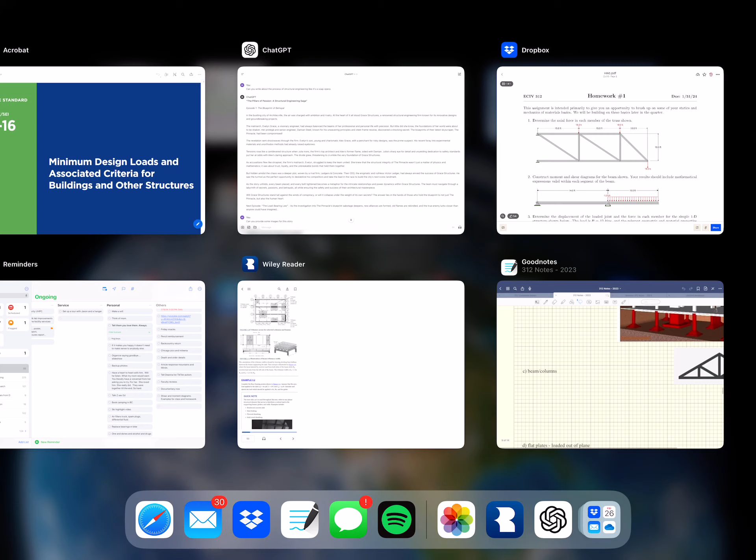I asked ChatGPT, can you write about the process of structural engineering like a soap opera? And this is what I came up with: The Pillars of Passion, a structural engineering saga. Isn't that creative? Because I'm into soap operas, like that one I showed you on YouTube last week, My Secret Life of My Billionaire Husband. I thought this was pretty interesting.

I read through it, and then I was like, oh, this is great. I'll post this on our D2L page, you can read through it. I was pretty into it actually, and I said, could you give me an image that represents it?

What it involves is there's a Grace structural engineering firm, and someone goes through and alters the plans to change it, and the other people didn't like the changes associated with it. So who did it? Who made the changes to the plans? They have lots of puns throughout.

Their protege and senior engineer, Damian Steele, known for his unwavering principles and steel frame resolve, discovered the shocking secret: the blueprints of their latest skyscraper, the pinnacle, had been compromised.

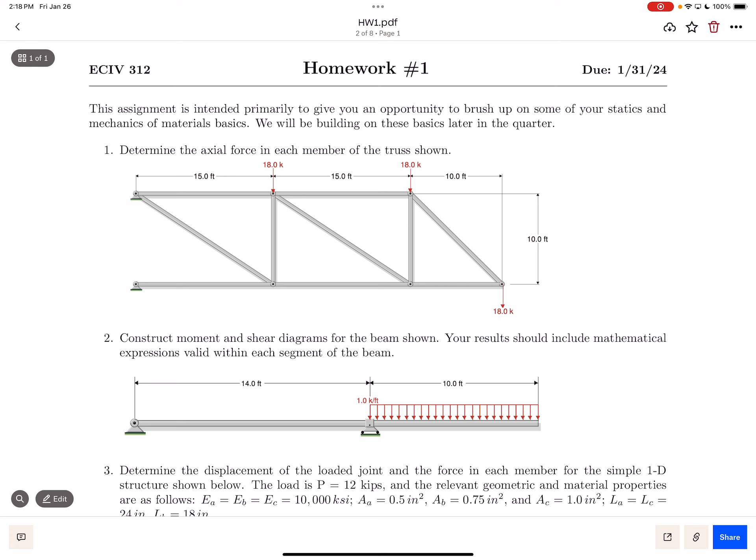This guy, shear moment diagrams, right? Including the mathematical expression is the hard part, not just drawing what it actually looks like. That's pretty straightforward, but actually giving the moment and shear equation at each point is harder. There'll be a shear and moment equation on this side, and a different one over here because there's a discontinuity there.

Same thing you do: you start out with reactions, and then you go from there. You could use whatever method. I did it two ways when I did the shear and moment diagram.

I don't even remember what it's called, but you figure out the reactions, and a reaction with a downward force will cause a jump down in your shear diagram, then it's constant as you go across, and then the shear goes up, bumps it up by that magnitude, and then goes across, or it'll decrease like that. I did it that way, then applied equations using derivatives and integrals and stuff.

The other way I did it was with method of sections, where you can cut this thing and you have a function of x, and then out pops the result, and you apply equilibrium with it. Either way, do your favorite method for doing shear moment diagrams.

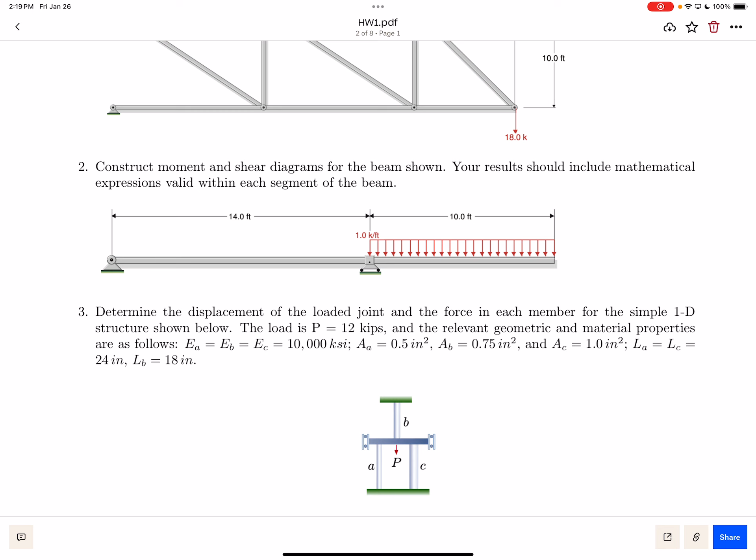Eventually, both of these things are going to come in heavy. We're going to talk about other ways of solving these things than you covered in mechanics of materials, but right now it's just a refresher. Let's start thinking like structural engineers again.

And then this guy right here: we apply load P right here, these things displace down, and then it pulls on this. So these two get squished, and then that guy gets pulled, right? The key to this is this thing isn't going to rotate, so they all undergo the same displacement.

You guys did this stuff, right? They all undergo the same displacement, and then all of them have to add up to P. And then I give you all those — there's the PL over AE, or AE over L times displacement gives you the P. So just a little hint on those things. Apply that and go from there.

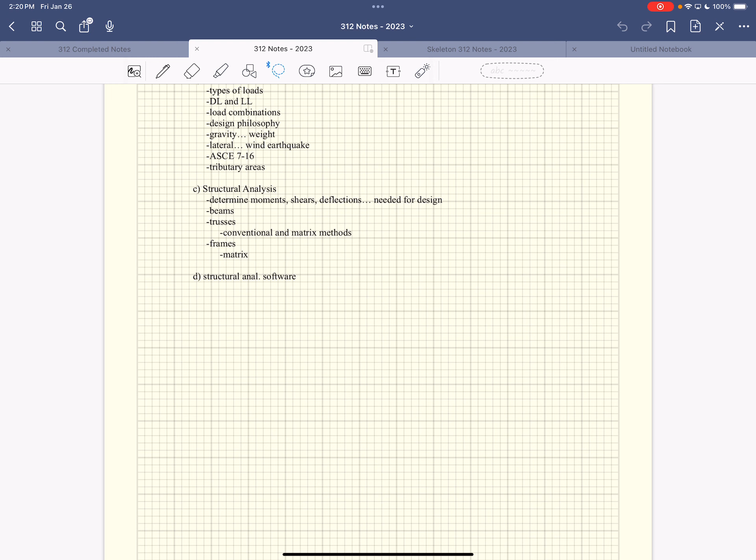Okay, so what we were just covering, we were talking about the flow of the course. We're going to talk about structural systems and behavior, types of elements, structural systems, gravity systems, lateral loads. Then we're going to do structural loads, right? This is probably by Monday we'll start all the different types of loads and the load combinations, design philosophies, gravity and weight, lateral loads. I'll introduce ASCE 7-16, that's what governs all of our loads. And that's kind of the first half of the class-ish.

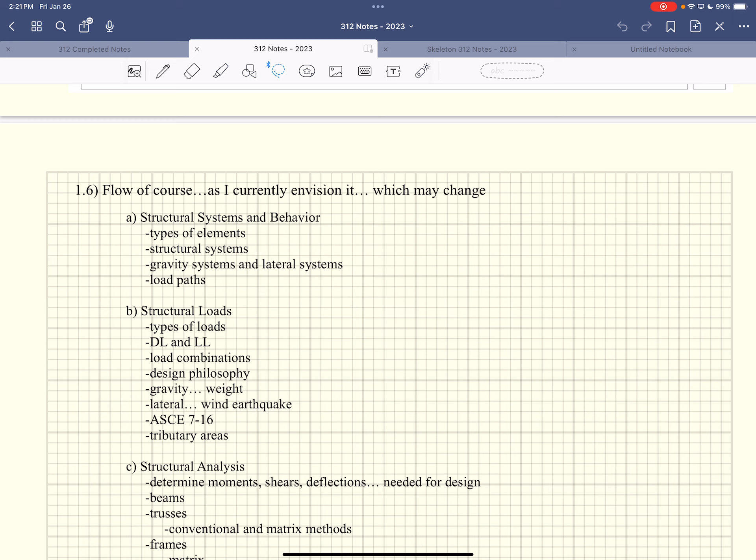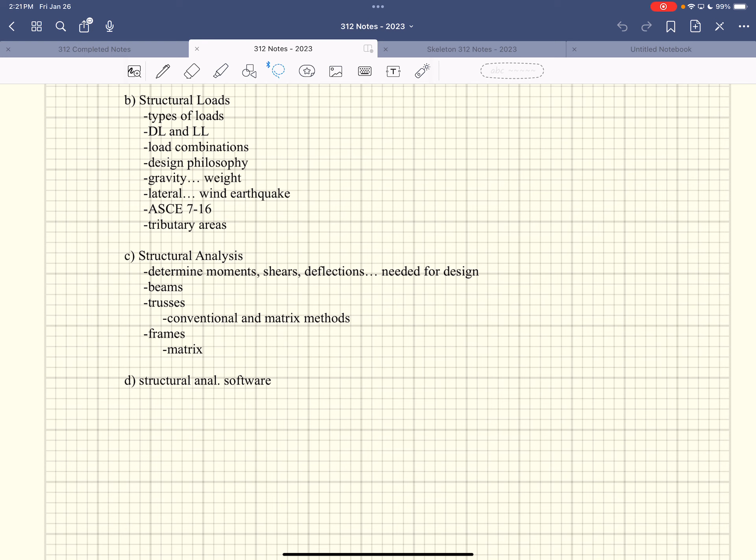This takes a while to kind of work our way through that. And then we'll get into structural analysis, right? Where we're going to be looking at moments and shears and axial loads and stuff like that. And we're going to mainly focus on matrix methods, and then we're going to work into structural analysis software, right? We're going to apply it, we're just going to draw a diagram in a computer program, and it's going to tell us all those things, right? But it's all based off of matrix methods.

Okay, so let's dive into structural systems and behavior. This is very, very basic, as if you've never even heard of structures before. We're going to have the main structural elements. So usually when you think of a structure in terms of buildings, you have a frame. This is considered a frame, where it has beams, it has columns, it has slabs, it has walls, things of that nature. So let's just go through and define, in a typical frame, the different elements.

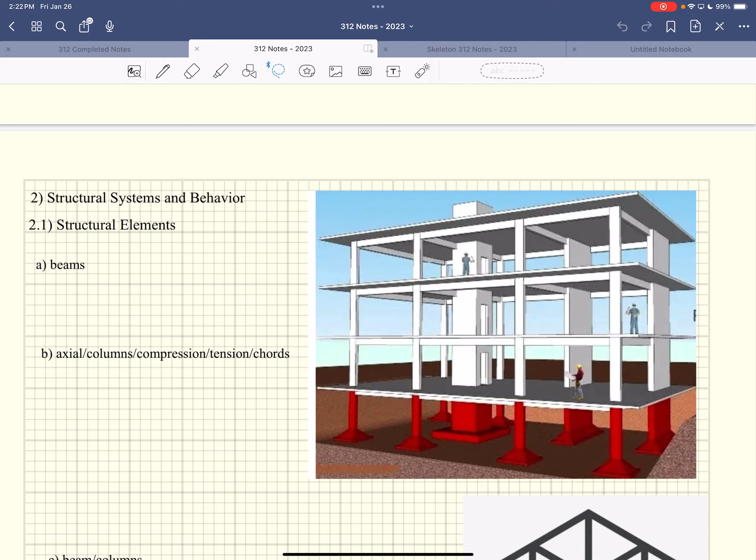Obviously you've heard of beams, right? These are the beams. This is what you've done, you've done the beams a lot in mechanics of materials. I mean, they're just transverse loads. They're modeled like this, typically a simple support one. They have transverse loads on them, like that. We apply loads like this. They carry loads with bending. That's kind of the beams.

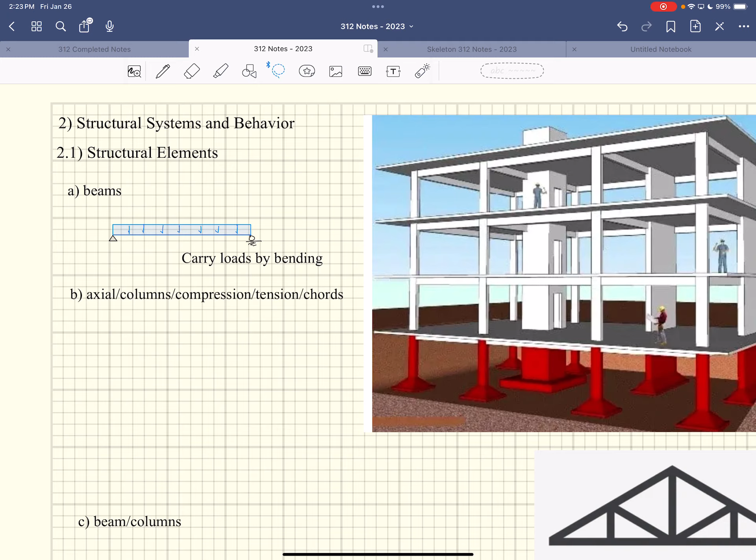Right, we've all seen beams before. That's these members, beams that are going across that way, and then this way as well, and they're loaded like that. And obviously, those are structural elements, and we have to design those. You could draw a little arrow if you want, but those are pretty straightforward.

And there's axial loaded members, right? So these beams carry loads by deflecting down and stuff like that. But there's axial loaded members. By axial loaded, these might be, I think I have different titles on your notes there, but I think I call them columns and compression members. But there are actually tension members out there and things of that nature. So I expanded a little bit to talk about axial loaded columns, or axial loaded things in general.

So that it covers the columns in our frames, right? But then sometimes these things can end up in tension. Another example would be a truss. Trusses are axially loaded, right? In trusses, they're called chords, your chords of your truss versus the columns here. But I mean, in those guys, right? They are...

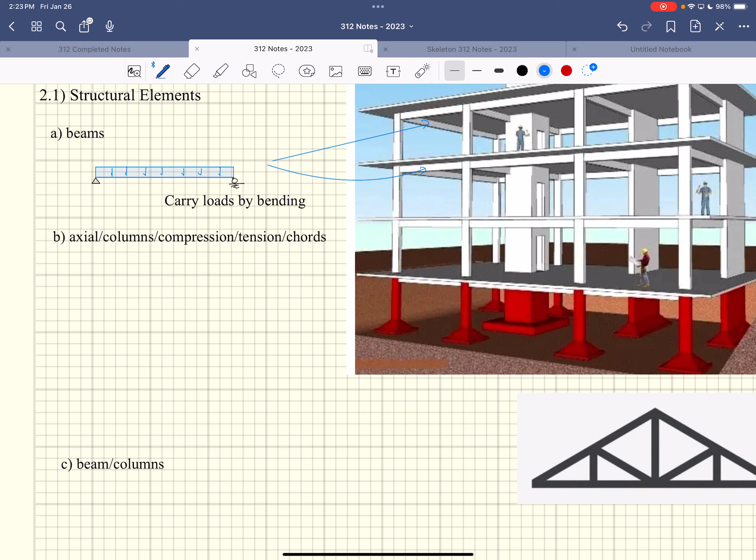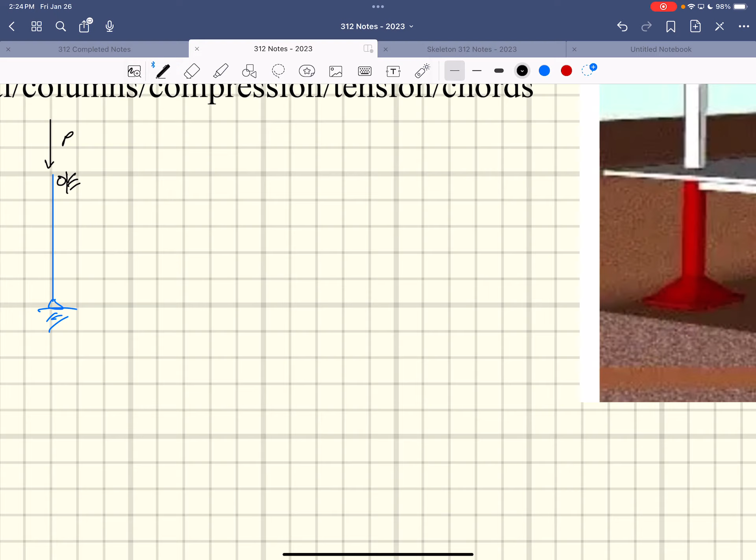...idealized as this, with some sort of roller like this, and then some load on it like this. These are axially loaded members, and they show up all over the place.

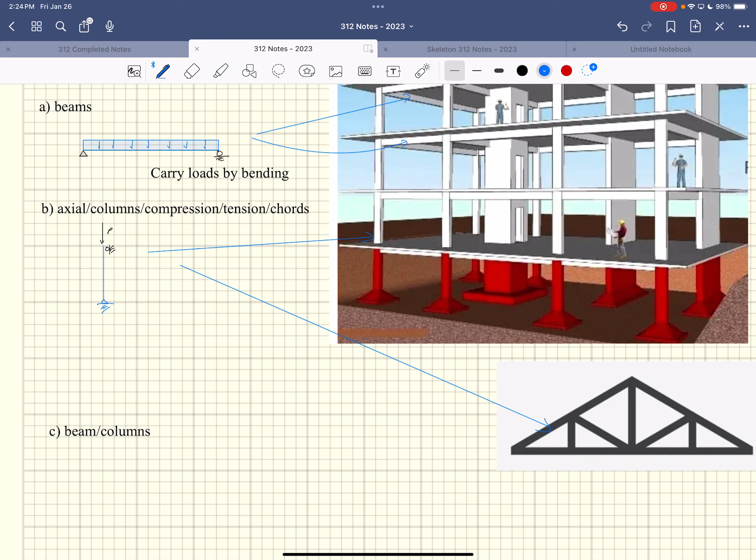Like I said, they end up as columns in these things. There's these. There we go, draw the drawing here. These are the columns. These guys are axially loaded as well in trusses. Like I said, they're either called columns or tension members. They could be in compression or tension, and then they're considered chords. They also have beam columns.

What do you think a beam column is? Very clever name for them. They act like beams and columns, right? They carry loads with bending and axial loads. We'll talk about systems in a minute here, but these things would be, they'd have a load on it like this.

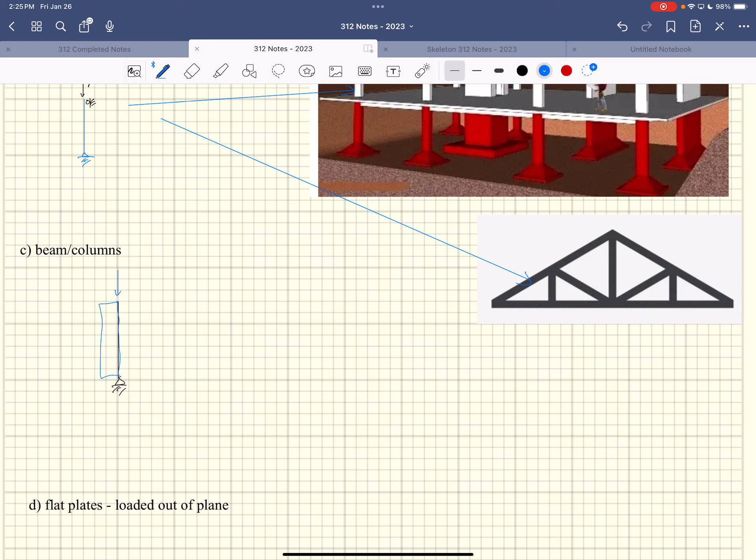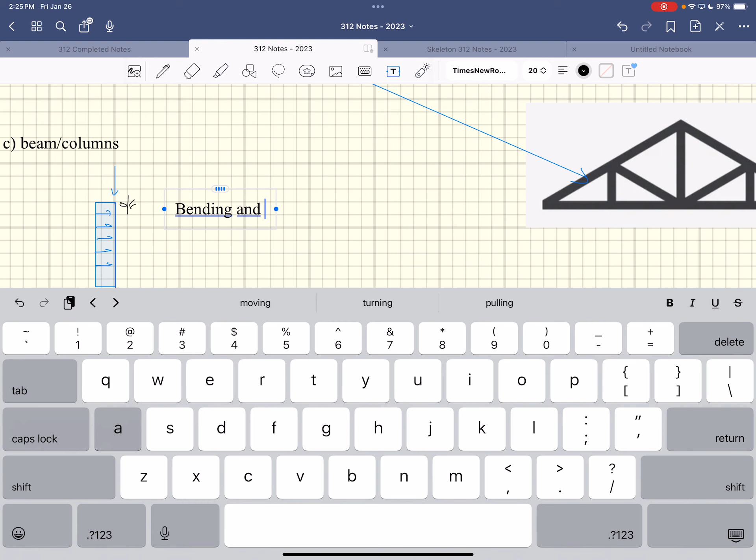Bending and axial load together - those are called beam columns. Very clever name, right? They act like beams and they act like columns, so what do we call them? Let's call them beam columns. That happens a lot. We end up with moments and axial loads on them as well.

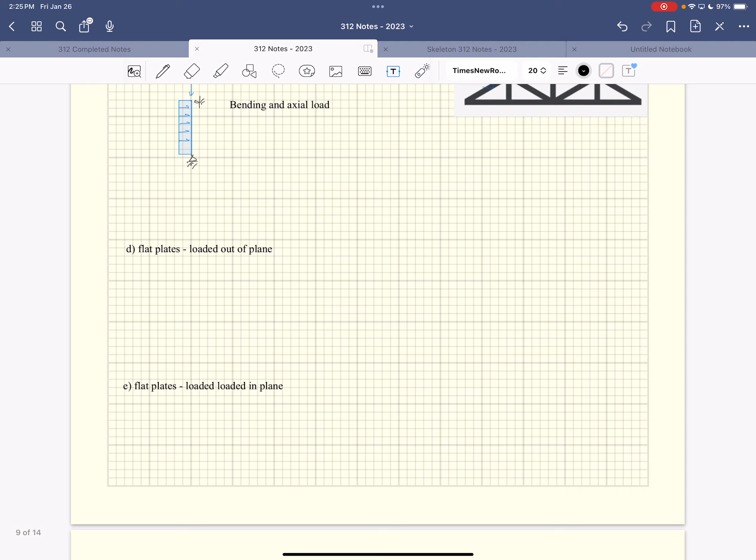The other element would be a flat plate - that's the technical term for it. You can load plates either in plane or out of plane, is what they're called.

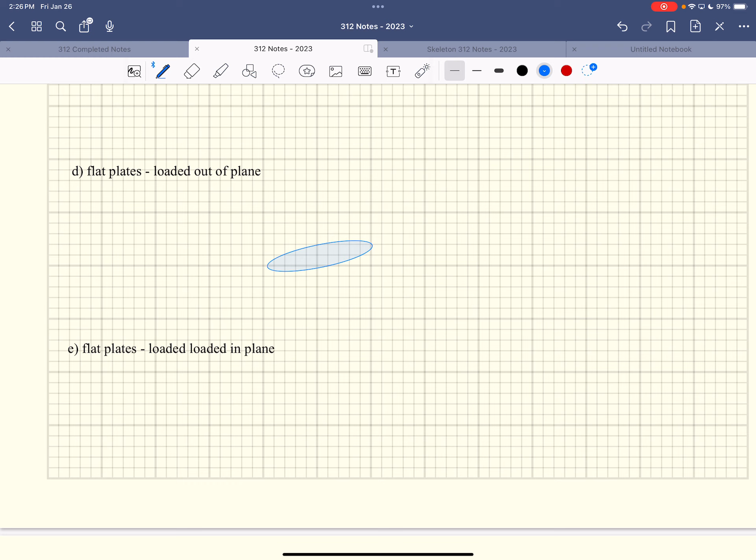Loaded out of plane would be a slab. Let's see if I can draw a slab for you.

One more time, what'd you do today? Well, the professor tried drawing a slab. Oh, I got it this time - I used the squares in the graph paper. That's a good start, I have graph paper there, I might as well use it.

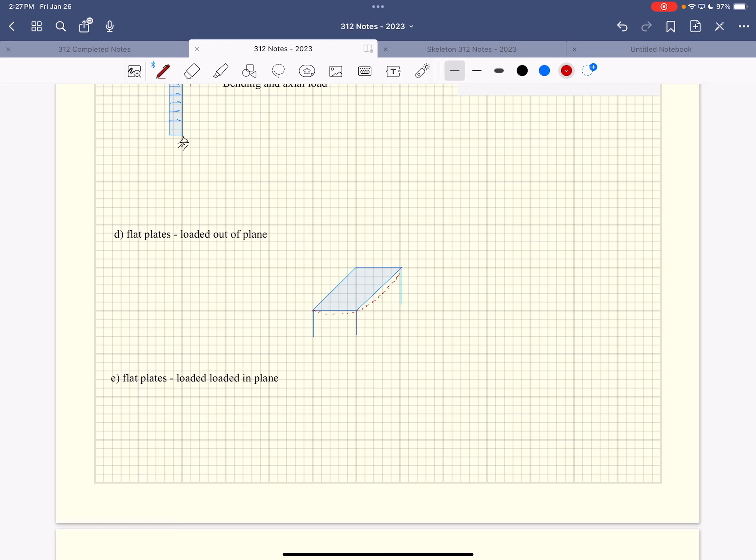What I mean by loaded out of plane: here's the plane of the wall, but I'm going to load it down like that, like a floor would do. This thing would deflect like this. It could deflect a couple different ways - there's one-way bending or two-way bending - but if you applied a load to the top of this thing, it's going to deflect down, kind of how I sketched it in red. So these are floors.

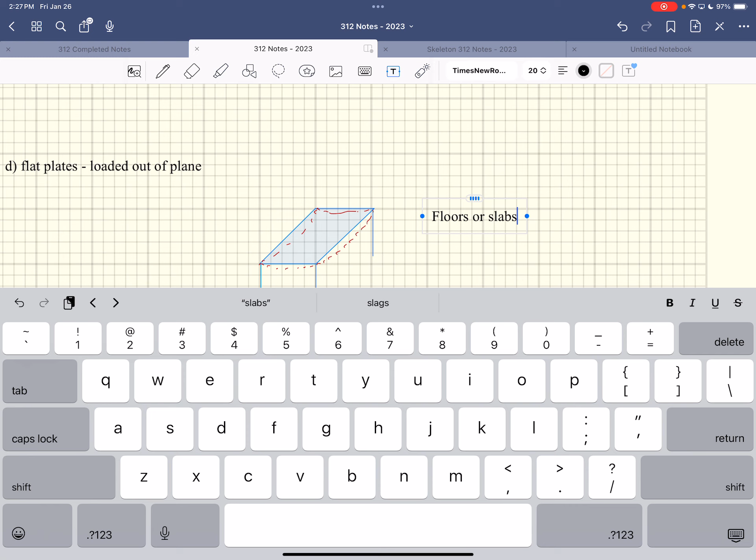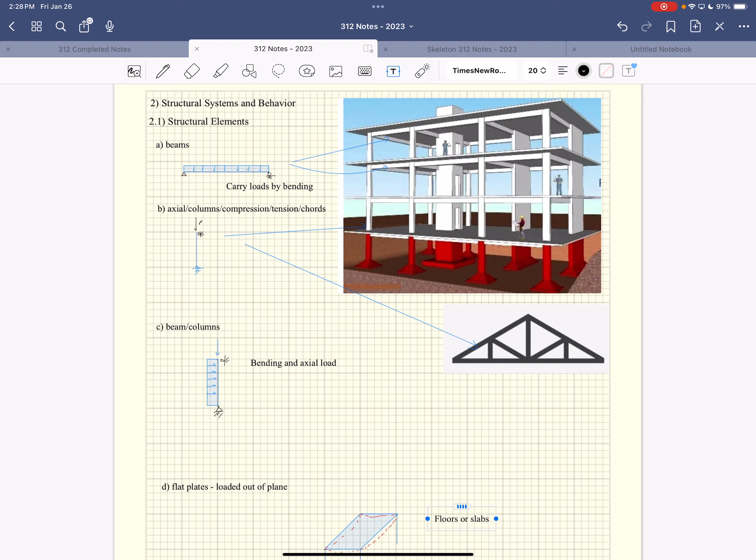Floors or slabs is another way to look at it. Those are easy to spot up here - these floors, these plates, these slabs are considered a structural element, and that's something we have to design. Each of these things we have to design - eventually we're going to design the beams, the axial loaded members, the beam columns, and the plates. So the whole design would be designing every one of those things.

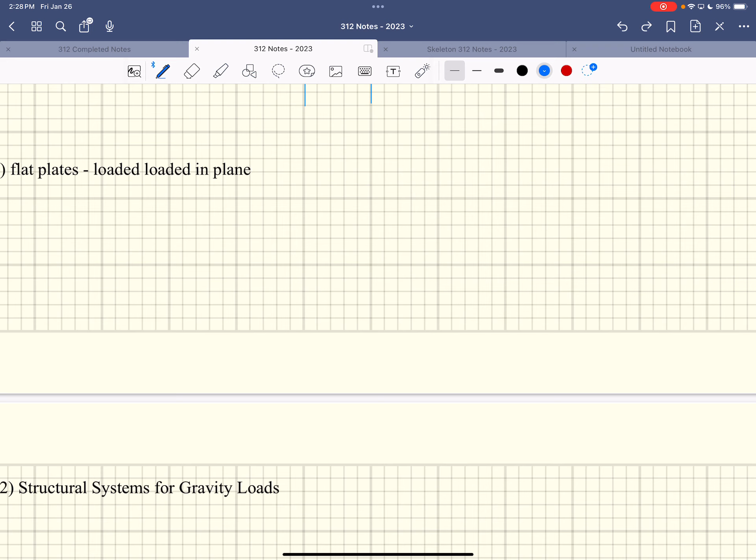This next one here would be flat plates loaded in plane. What I mean by in plane - let me try to draw another picture, drawn up on its side. Anybody else have trouble envisioning what it looks like in an isometric drawing? That's what I've tried to do, draw isometric drawings.

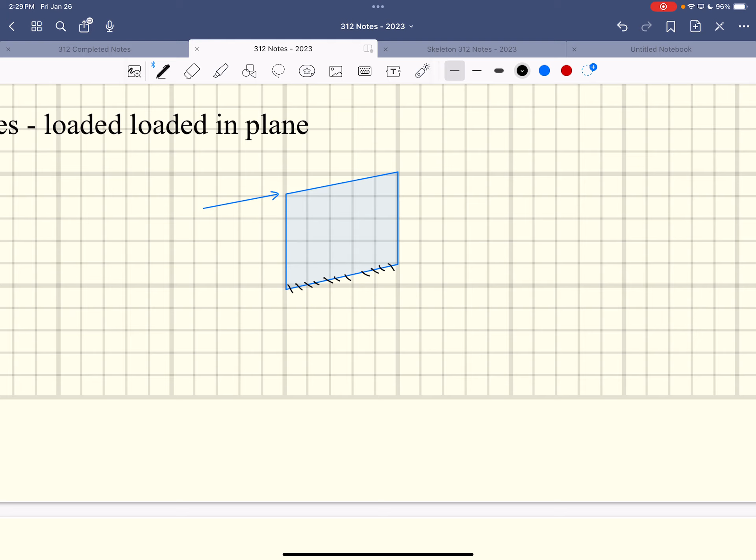Loading it like this - the ground is like this, the ground's down here, the support there, and you're loading it in plane. So instead of pushing on it this way, we're pushing it along like that, in plane. Why would we do that? Why would you load a plate like that?

Well, it's part of the lateral system - we'll talk about the systems in a minute. There's a gravity system and a lateral system, so if you push down on it vertically or push on it horizontally, there's different components. These things are called shear walls. This is one way that we can load it.

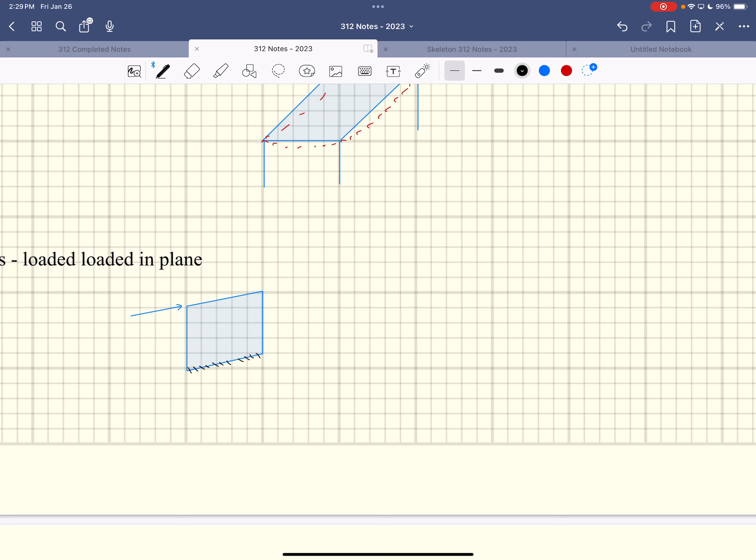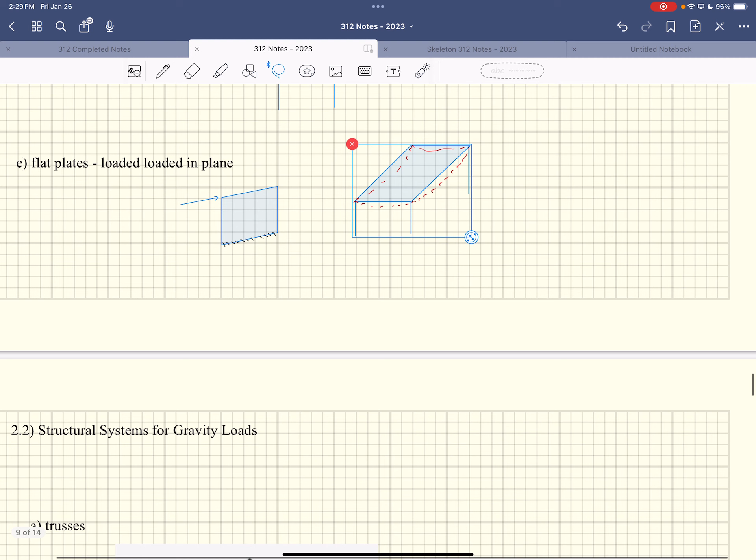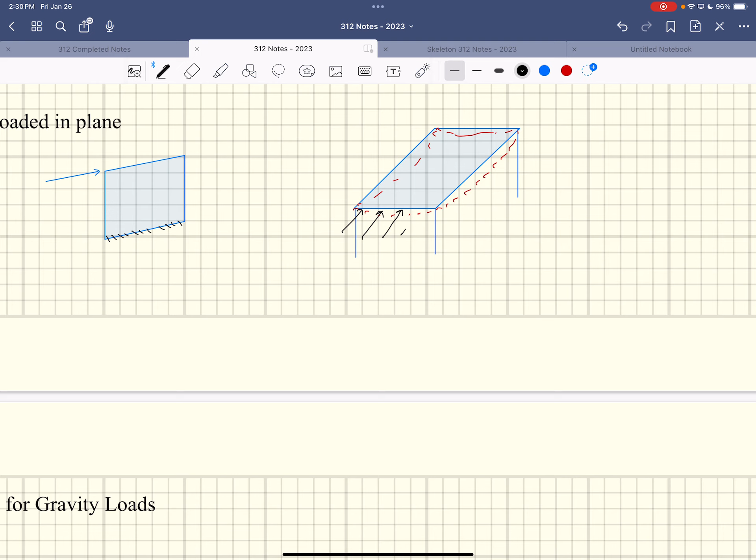The other way we can load it, like an in-plane load on a wall, would be applying a load like this - so if you had the same type of plate, you can also apply loads in that direction, still again in the plane that the wall is taken up.

Over here on the left, this is called a shear wall. When we talk about plates like that - and this is called a diaphragm, a floor diaphragm. When it's loaded like this, it's called a shear wall; if it's loaded like this, it's called a diaphragm.

We'll talk about those in more detail later, but back up to our structure up here - these guys right here, even the elevator core that they have in here, those are considered shear walls. Because you can imagine if you came in and pushed this thing from the side, say wind hitting the side of the structure - obviously there'd be cladding on the outside, but the wind hitting the side of this thing, those loads have to get resisted. These lateral loads are resisted by something.

One of the things that we resist it with is walls - it's actually a very common way, especially in housing. My house's lateral system is shear walls, that's what we put in to keep it from tipping over. And so you can imagine how these things are loaded - there's a big old point load that'll come in on each floor.

That'll come into the side of these walls, and so that'll be a wall or a plate that's loaded laterally, okay? The other one that I drew was a plate being loaded like this.

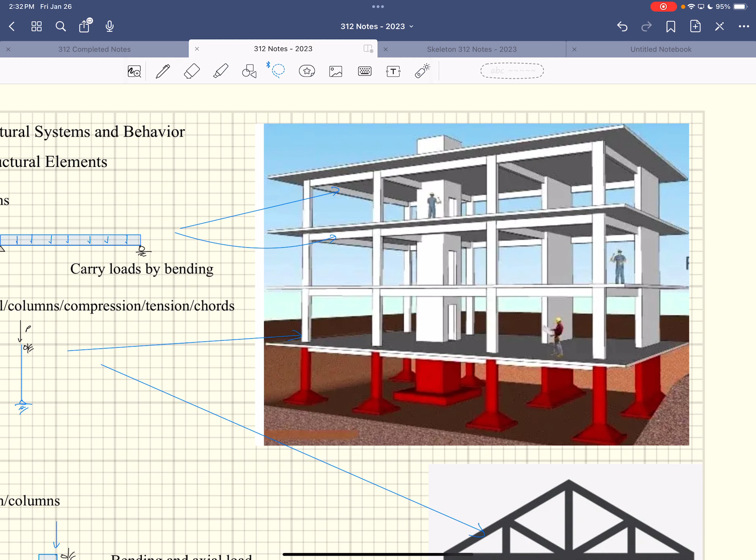Those are your main elements, really. All of structural engineering involves these basic elements. There's no other elements. So when you talk about the design of a structure, you're talking about the design of beams, the axial members, the beam columns, the flat plates in terms of the floors and slabs, and then the shear walls or the diaphragms. And that's it.

So all of structural engineering is, after we talk about getting the loads, you design. Structures 2 says, all right, how do we design these things? And all those other classes I showed you were all about how you go about designing these different things out of all the different materials, either concrete, steel, wood, or masonry. It's all about those designs. But these are all the basic elements.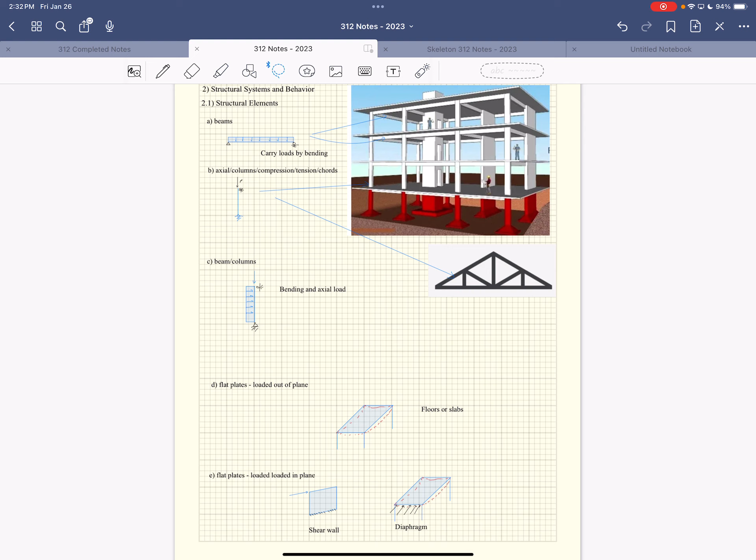The truss is made up of simply all axial loaded members. There's no other elements made in there. I lied a little bit though.

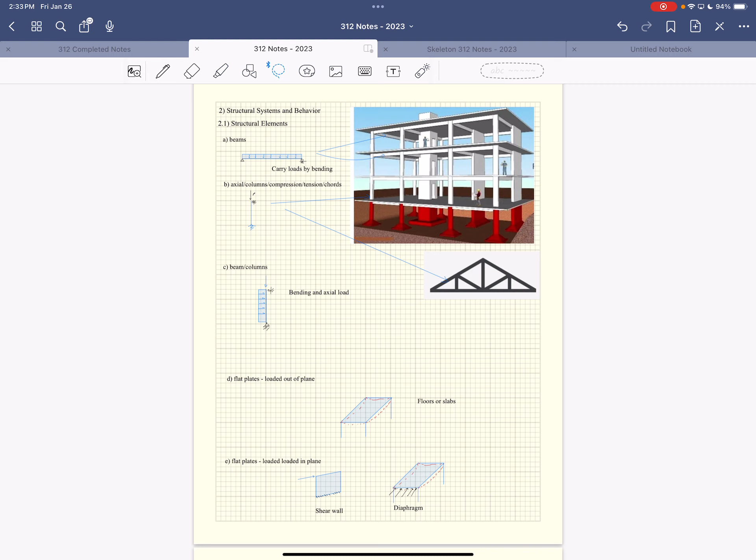There's not only designing these things, there's also designing the connections. You have to connect all of these different structural elements, and that's the other part of structural engineering: how do you go about connecting all of these elements? Because there's big forces that come into those connections. Questions about that? Those are the types of elements.

Those types of elements go into making a system. A system would be just a system of elements. The elements, all the things we just talked about before, but then how you confine them and connect them, and stuff like that, they all behave differently.

My notes are on my phone, by the way, so it's not like I'm texting up here. Sometimes I'm texting, but not right now.

All right, let's talk about the different systems. Again, I mentioned this before, there's actually 2 main types of systems: a gravity system and a lateral system. The gravity system has to do with supporting gravity. Well, what are the gravity loads? It's the weight.

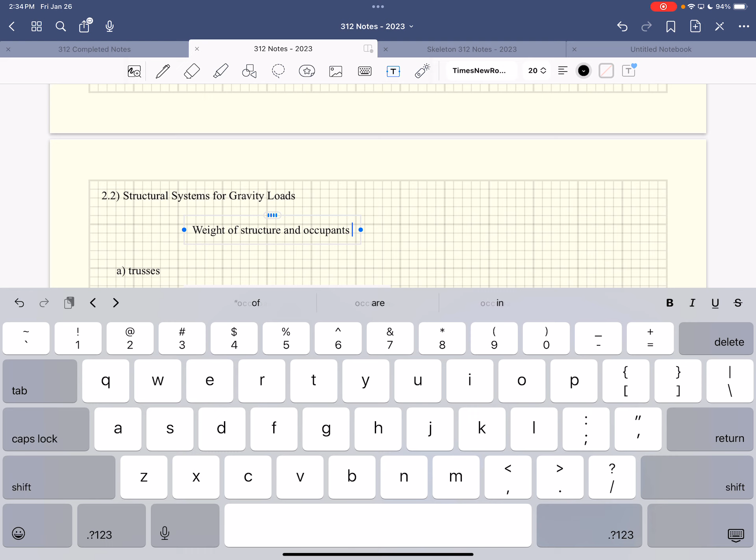Weight of structure and occupants, or occupancy loading, not just occupants, but it's all weight. It's the pull of gravity on the structure.

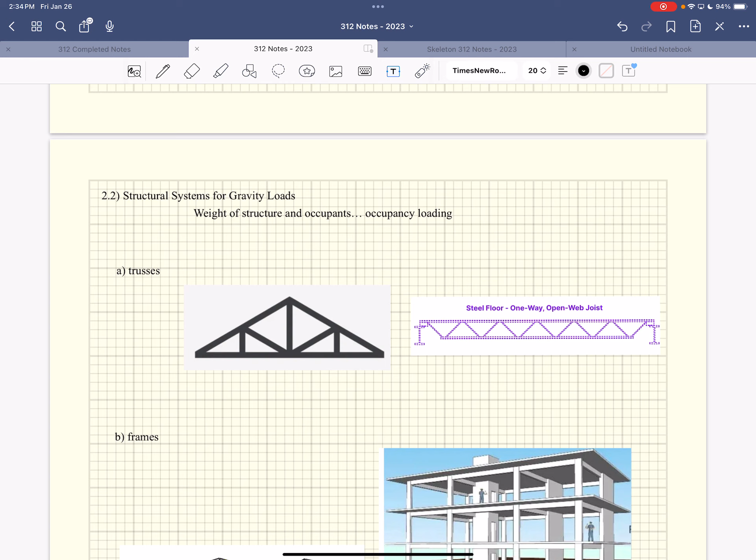Obviously, this is the key one. Back in the day, that's all people cared about. So your structures downtown, the structural engineers back in the day were like, hey, we just really care about weight because that's the most immediate thing that you see, and then, oh, by the way, there might be some wind or something like that. But nowadays, they're equally as important. You design for gravity and lateral systems, and that's why our structures stand up in earthquakes and stuff like that.

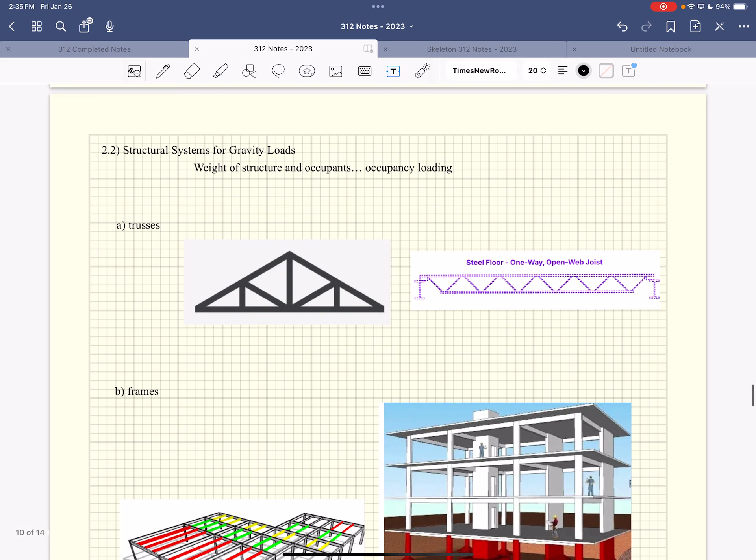So then what are the systems for supporting gravity? Obviously, there's the truss. You've seen these before. This is statics, you don't do anything in mechanics of materials with these. These are all just going back a couple semesters.

But this is a key one, and this is actually how they start all structural engineering classes, with the discussion of trusses and the analysis of trusses. And what's nice about them is you only put material where you need it.

You can make a whole triangle and it would be stronger than a truss, but we're just saying, well, how can we optimally use our materials? We'll make them spread out as much as possible, giving them the biggest moment of inertia possible. If you spread them out like this, you can carry more load. It's like making a deeper and deeper beam. So you do so with trusses, and you only put elements where you need elements.

I did a big research project a couple years ago. There's this methodology called topology optimization, where you model these things in finite elements, and then you say, hey, analyze this thing and do an optimization on it. The whole theory behind it is like the computer's going through, and it's actually based off the theory of evolution, if you believe in that sort of thing.

No, but the theory of evolution, where you start out with some design or some initial deal, and then there's rewards and penalties as you go along, and it goes through thousands and thousands, if not millions of iterations, and it evolves. If you do something right, it basically evolves into the optimal structure. So we did this big deal with a grad student of mine, and she went through and put in all these parameters, and we said, oh, this is going to be magnificent, we're going to put it in and let it run and see what it comes up with.

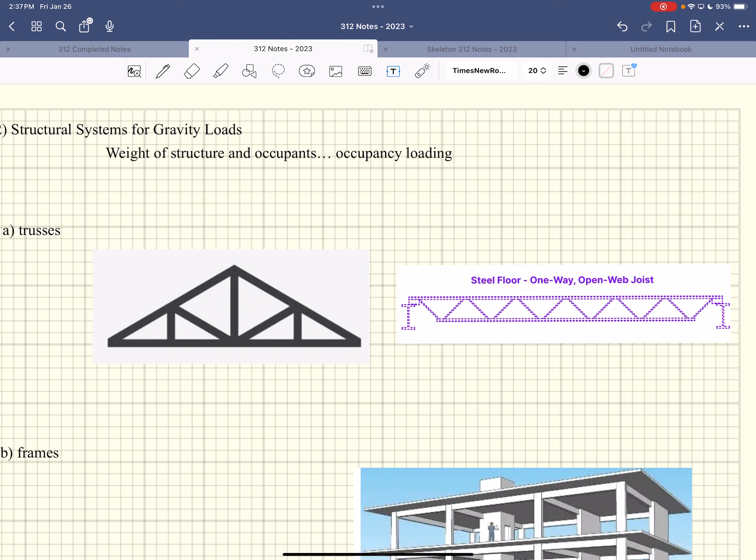The key parts are these parts, and then these are just used to kind of hold them together and transfer loads between them. So we'll talk about analyzing these trusses. The other most common type is a frame. These are our typical frames. They're called frames, and the frames consist of beams and columns and plates. So we already looked at these, but these are the typical structural systems that we'll see.

And we're going to build up to, well, how do the loads get transferred around in a frame? They start out in the plate, then they go into the beams, and then they go into these things we're going to call girders. When beams feed into those girders, the girders transfer the load over. That's called tracing the load path, and we're going to talk about load paths, because all buildings have these load paths associated with them. But this is the other type of system, a frame.

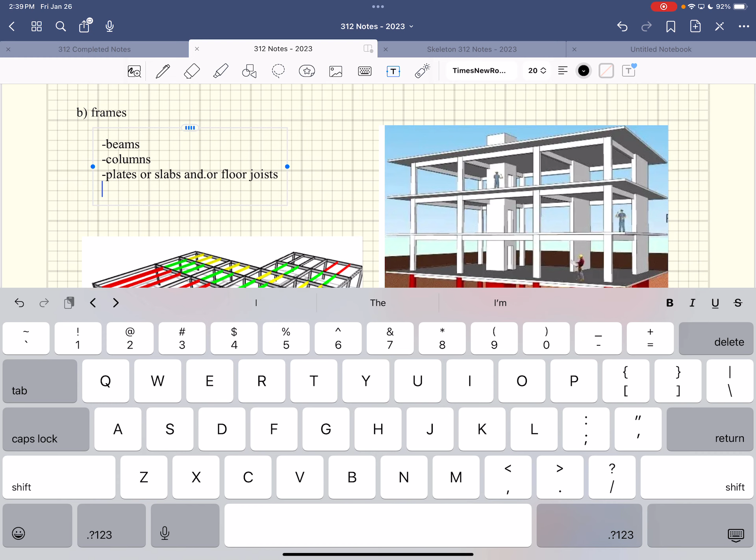They consist of, you might as well just write some stuff down every once in a while. They've got beams, they've got columns, they've got plates or slabs, floor joists, and or girders for now. Girders and beams get used interchangeably. Usually, what you call a girder is something that has beams framing into it. So you've got these beams going across, and the slabs sitting on those, and then those beams transfer the load into these girders, which come in as point loads.

And so usually that's what it means. If you hear the word girder, that's what it's talking about, which is a weird word to say. I just said it like five times in a row. Girder, girder, girder. Not weird, but it is weird. But then in a bridge, all the beams are just called girders. So there's a lot of interchanging terminology. In a building though, girders usually means that things are being transferred into it.

Another type of structure would be our cable tension structures. They basically draw like an idealization of that. You can imagine if you had a cable strung between two points and applied a load in the middle of it - that's structurally stable. It's kind of weird, but it is structurally stable, and it's carrying the load with axial loads. They're actually very efficient, cable structures are. You pull down, and it's just all axial loaded cables, which is pretty crazy.

I mean, just to put things into perspective, we'll learn about this in structures too, but you guys learned about yield stress and things like that, right? And maybe you never fully grasped like how strong steel, for example, is. Or let's start with concrete. Concrete can carry 4,000 pounds per square inch.

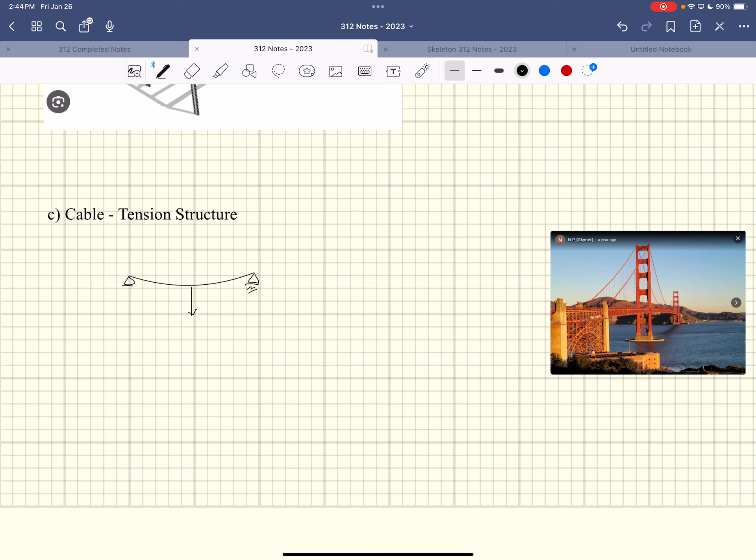The other one, off topic but cool, is the Brooklyn Bridge. Anybody been across it? It's phenomenal, so cool. Guess when it was built — 1869. Within 5 years after the Civil War. Isn't that crazy? They were building shit like that.

I read a book recently — well, had it read to me, I listen to audiobooks since I can't read. It's called The Great Bridge, about the engineering behind the Brooklyn Bridge, and it was phenomenal. It could be considered boring by some, but to a structural engineering professor it was very entertaining.

Especially how they did the foundation — these big caissons, pressurized. They'd go underneath it with this little bell isolated from the water, pressurized, and people were down there shoveling underneath it. As they shoveled, the bell continued to sink. Then they started using dynamite, blowing stuff up and going down to dig. Hundreds and hundreds of people died in the construction of the Brooklyn Bridge — it was incredibly unsafe.

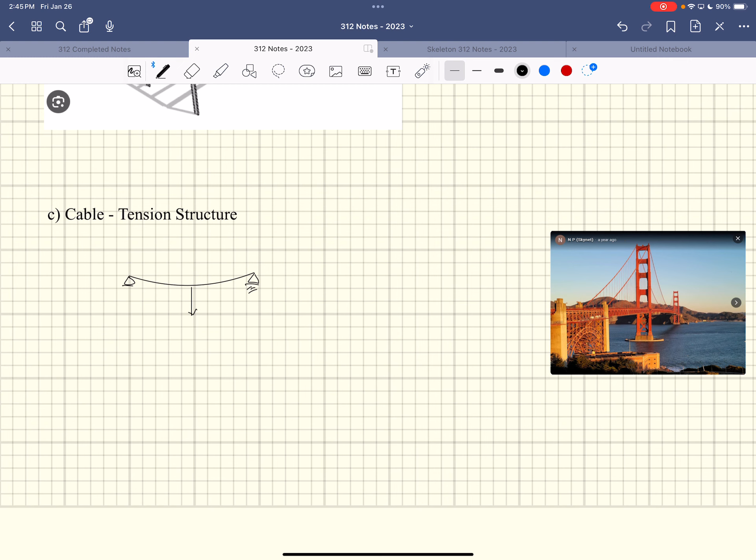But cable or tension structures are really cool — a very efficient way to carry loads. If it wasn't for that, you couldn't do these big, large spans and stuff like that.

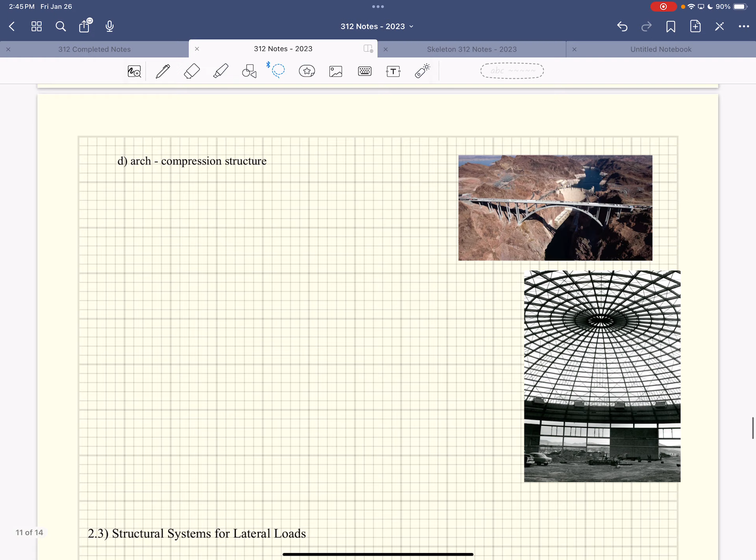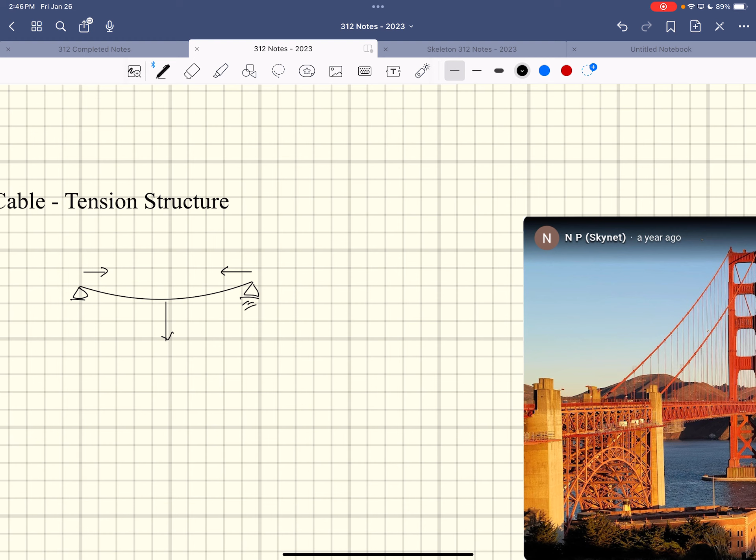These guys — arch or compression structures — are the opposite. I want to come back up to this. This thing would cause big reactions like this, pulling on those things, and you have to resist that. Compression structures go the other way: I'd need a support on this end, and you apply a load like this, which causes reaction forces out like that. You call that thrust, I think, is what you call it.

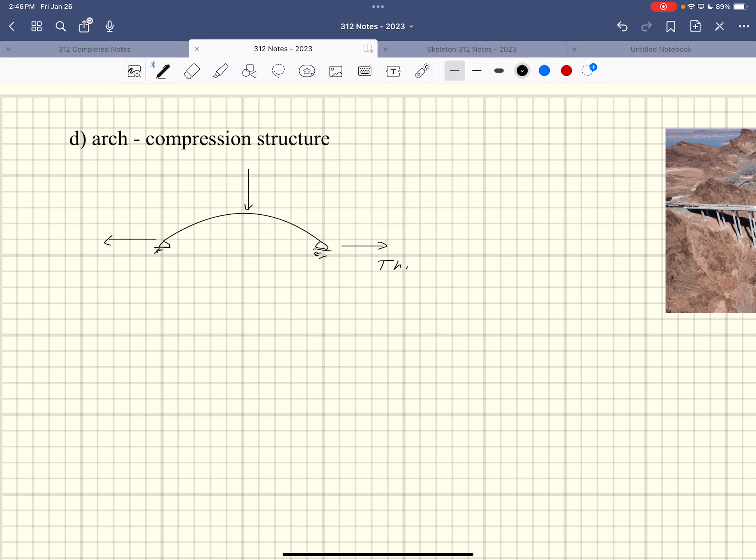Tried to write. It would push out like that.

Examples of that would be the Hoover Dam bypass. This is a compression structure, you push on it, and then this arch is actually fully axially loaded.

You look back at some old images of some of the first bridges they did back in the day. They're still standing up, right? They stack these blocks up like this and apply load. The way it works, as long as you resist this thrust, as long as you provide a reaction there to resist that thrust, that member becomes fully axially loaded, which is very efficient. Carrying things axially is very efficient.

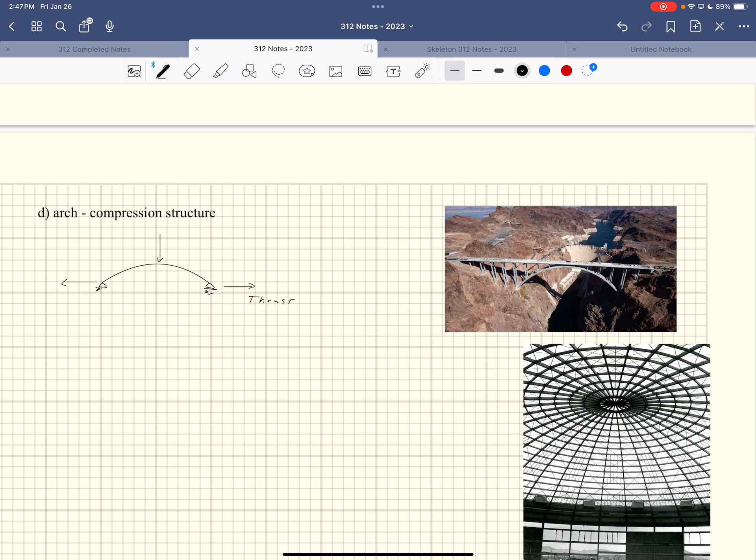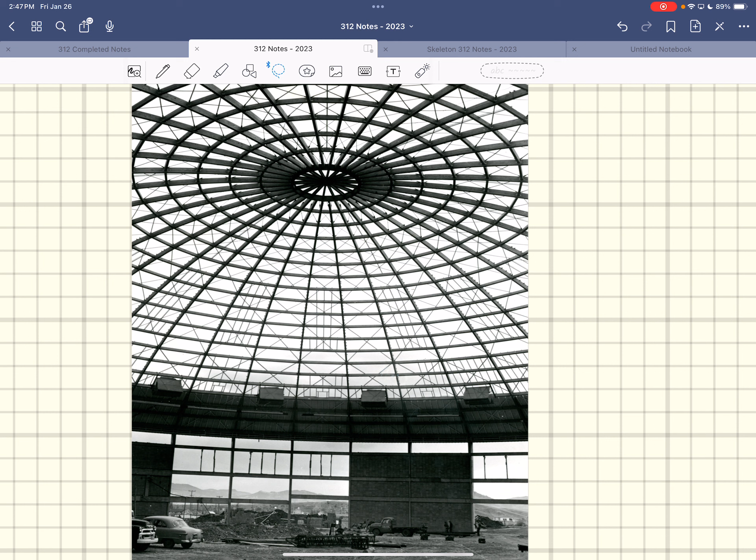Another perfect example would be our dome here. This is our dome under construction. Back in the day, look at the era it was built - I think it was built in the early 60s. So they have these big timbers, made of timber. It used to be the largest timber dome in the world.

We'd be talking about this? Yeah, right here in our backyard. And then the Tacoma Dome took care of it, took it out.

In this case, you got all these members coming up, and you got a big compression ring. Imagine if you push down on the top of this, that compression ring would go into compression. And then everything on the outside, you got this tension ring that's resisting it that way. But all these members are loaded in compression.

I can't help it, I gotta show you some pictures.

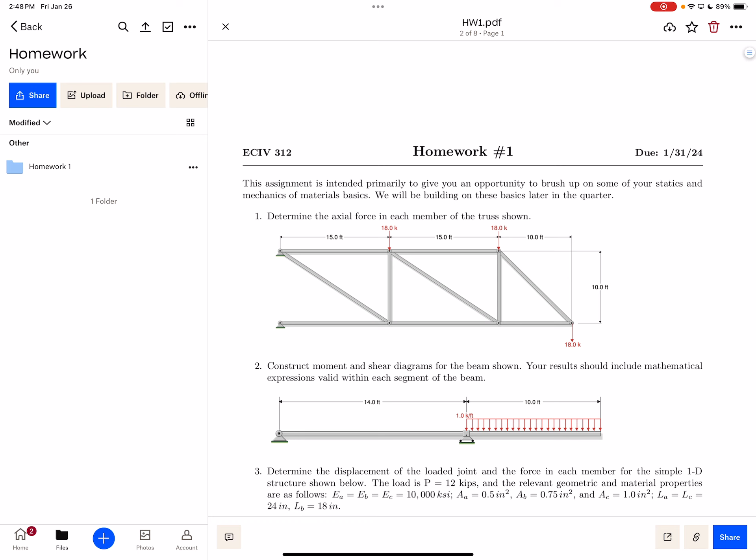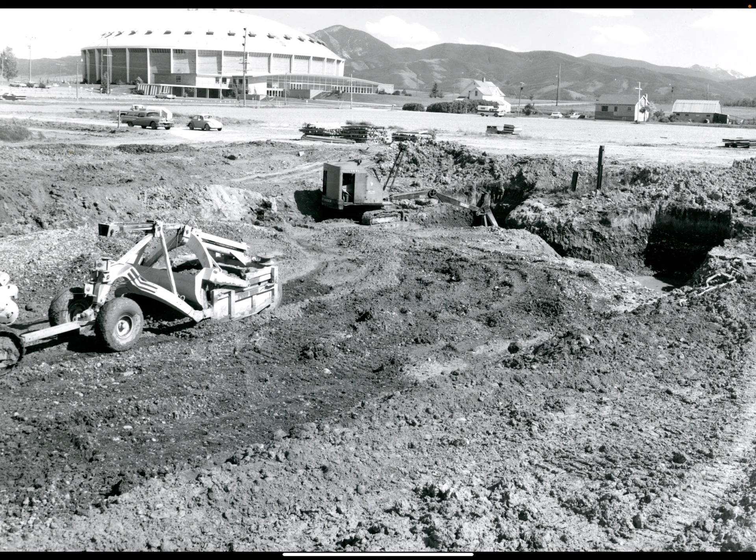Under construction - there was one thing in particular I wanted to show you. Now it's a little bit more advanced, not mules anymore - they have this guy with all cables and stuff. It's still pre-hydraulics, all cable-based as it's digging, but at least it's a piece of equipment.

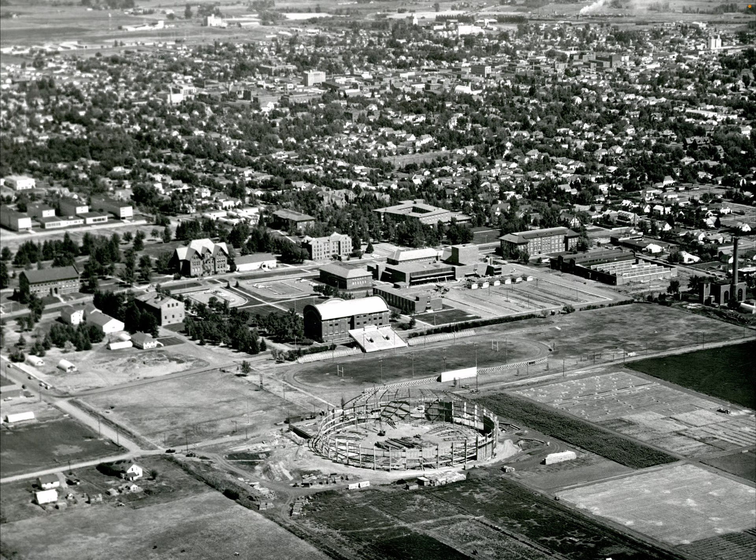And it's being constructed - pretty cool that it's out in the middle of Montana. This is really cool. Before everything's actually up into place, it's not stable. You have to support these things.

So what they did is they went down and cut a bunch of big tall trees, then spliced those trees together so they could reach up and hold on to the thing until they got out there. And even once they got out there, they still had to hold on to it, and then bring in all the other ones. All of them had to be in place.

And the lateral supports - remember what would happen if this thing twisted, the whole thing's coming down. So you had all those lateral supports, they had to have those things in place. And they had to have all these timbers there until they got the lateral supports in. Once they got it, then they could take down these timbers.

Guess how they took down the timbers? They sent a guy out there, probably an intern, with a chainsaw. That's exactly what it is - went out there with a chainsaw, started cutting them down, and they would drop and fall over as they went along. They were probably in there like, oh God, they should have sent the real engineer out there.

Back to the Roman days, like when you pull the scaffolding off to make sure it's going to stay. Imagine doing that - just boom, and the thing would start to sink every time one of those supports would be removed.

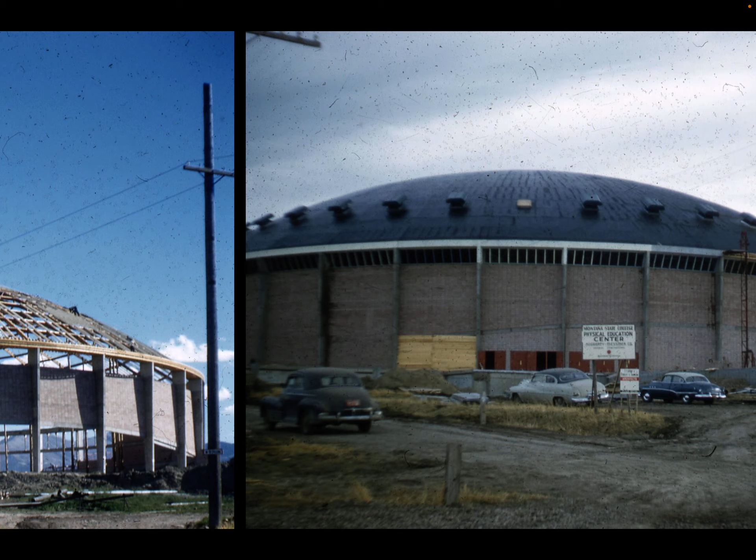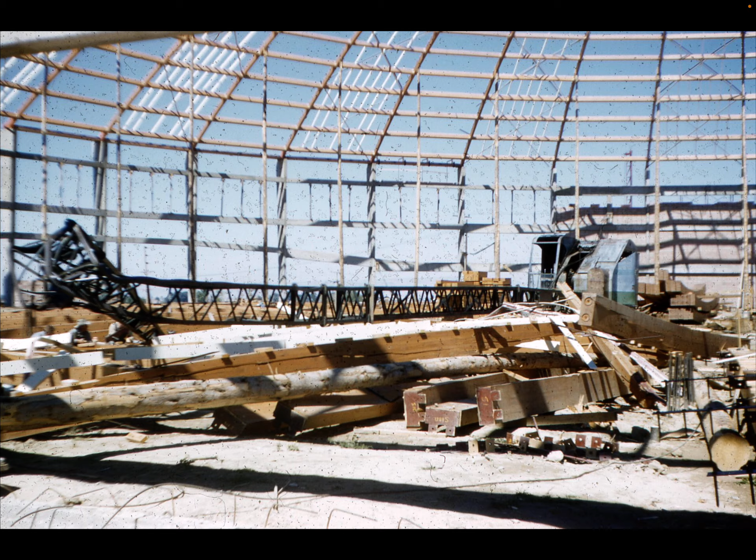So on the outside, there's a big tension ring that goes around the whole outside, spanning all the way around, and the compression ring up at the top. You kind of see the tension ring there.

And then there was an accident, right? That crane, it wasn't supposed to be like that. It fell over. A big part of it fell down. There's a little thing of the accident.

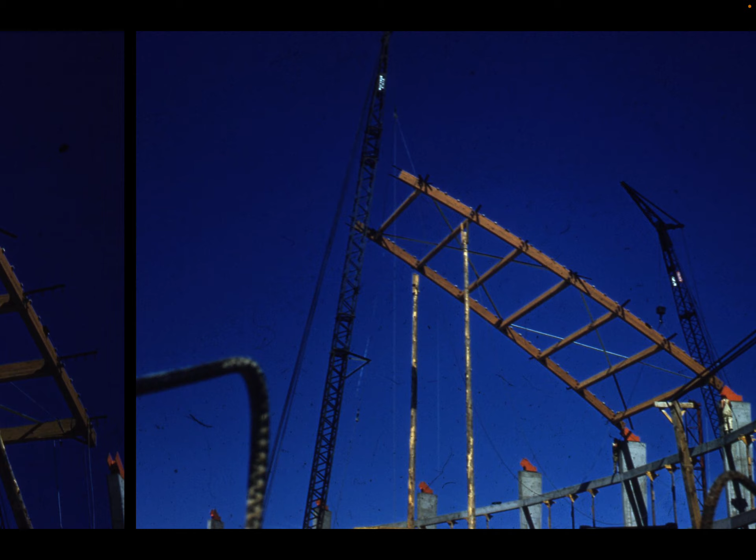Pretty Wild West back then. I mean, not as Wild West, but also kind of Wild West. Like, look where it's built. It's in the middle of a field, right?

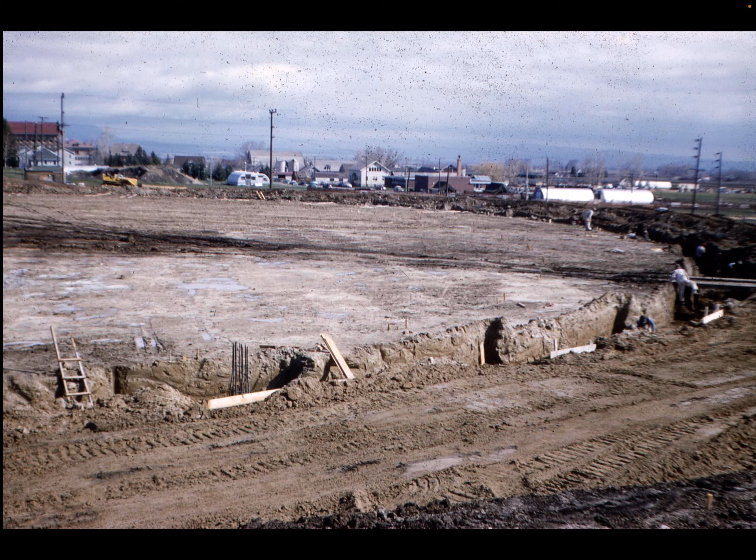But where I got these pictures from was the architect on the project. When I first started here 18 years ago, the architect was still alive. He's since passed, but he came in and gave a presentation to the class about the design. So all these pictures came directly from him. The steam tunnel looks a little bit different on that.

Okay, and we were doing pretty good, and now we're back to not so good. So compression to arches and structures, right?

Okay, so all this stuff is gravity, right? This is the weight of the structure. You're applying gravity loads to this. These are the main types.

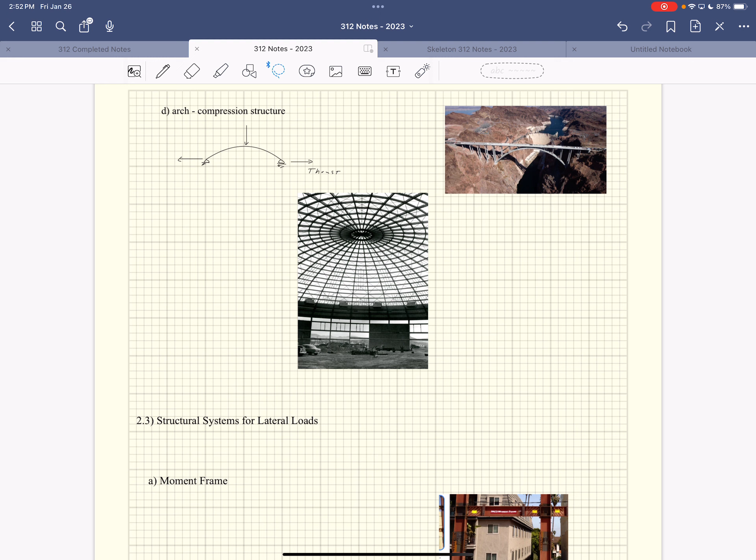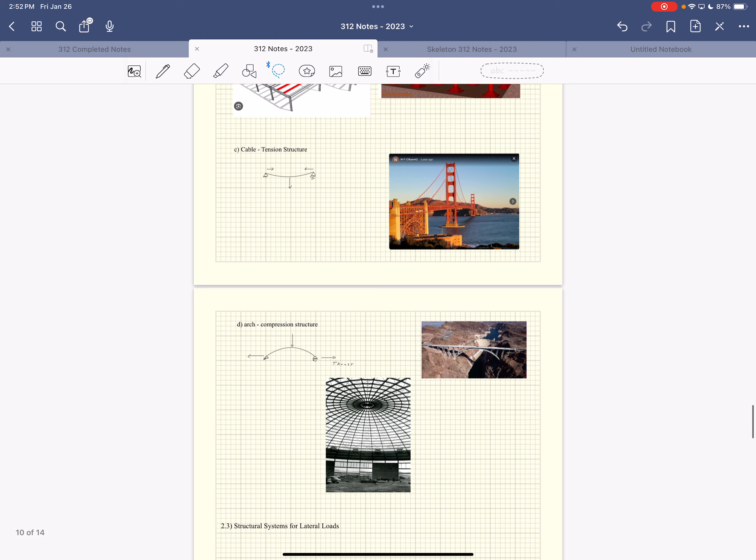We're going to primarily focus in this class at the beginning on these two: frames and trusses. If you go to be a real structural engineer, this is where you're going to live mostly. I think very rarely will you do a tension structure or an arch. Those are usually specialized applications, okay?

So for lateral loads, this has to do with wind and earthquake. We said that a couple of times before, right? Wind and earthquakes, right, and then there's other things too.

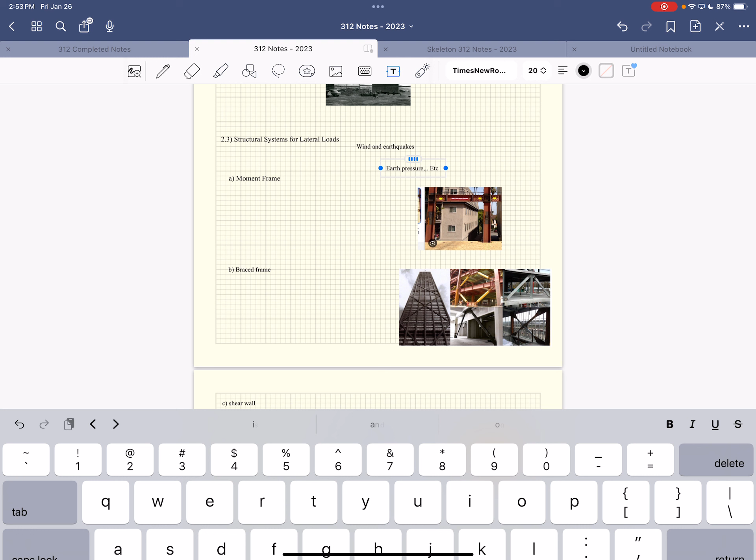We talked about earth pressure and etc. The fact of backfilling a foundation, or if you have one of those walls called a retaining wall - if you have a retaining wall, those things get laterally loaded. But in terms of buildings, we're talking usually more wind and earthquakes.

So there's the main types of lateral systems that are out there, okay, that you will typically see. There's a bunch of other ones, so these are just examples.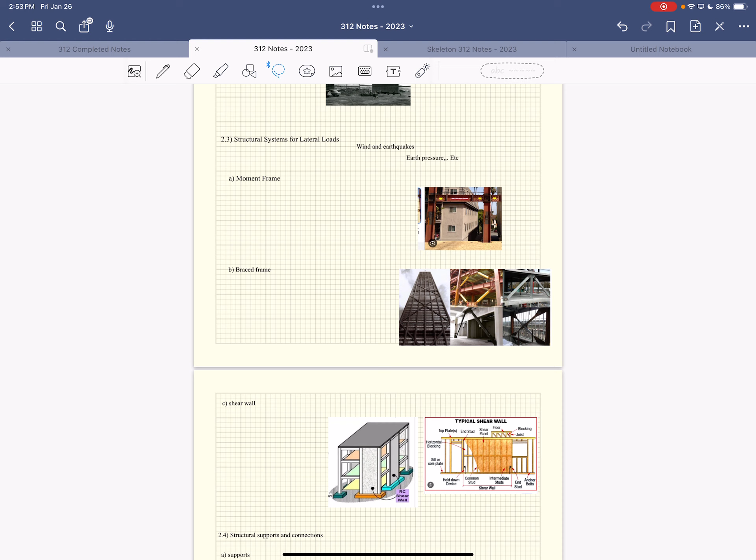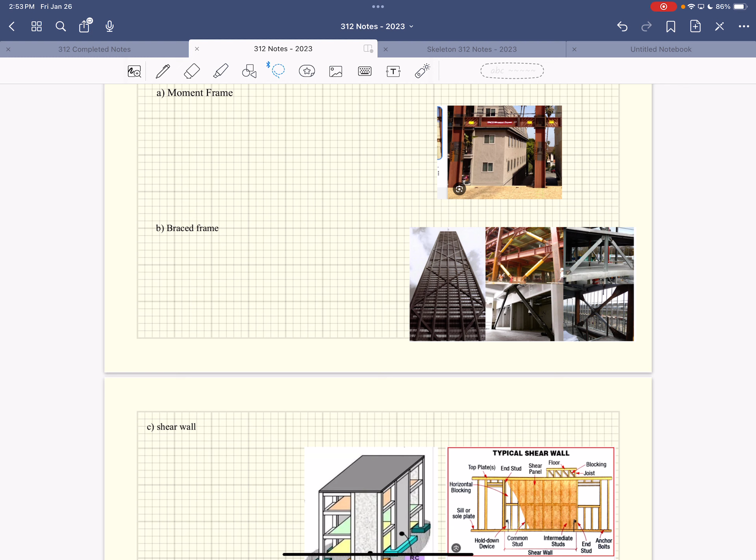One is a moment frame, okay? The moment frame is pretty common. They have moment frames all over Norm Asbjornson, right? Those are the primary lateral system in Norm - our moment frames.

And the other thing I want to point out - let's go here. I keep forgetting to say this. I'm going to forget to say it by the time I'm done drawing here too. Right?

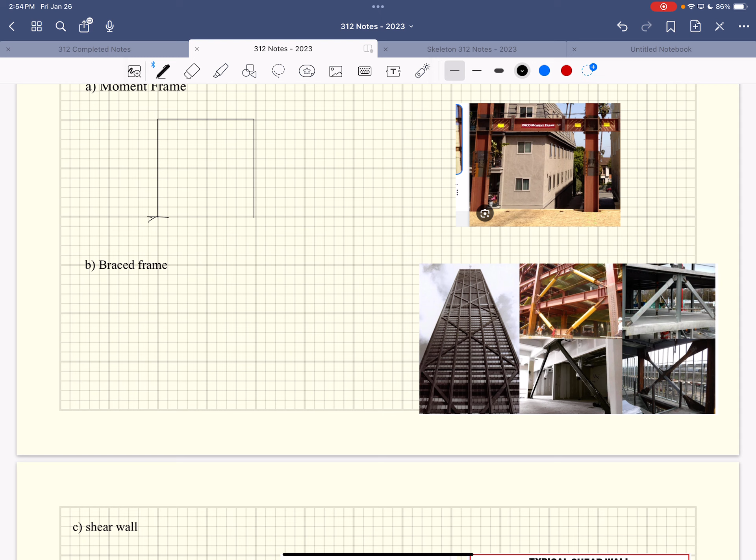So this is the real thing, right? This is a moment frame. This is the real one. But then I don't, when I go to model it, I don't draw it like this - I draw it like this. And this is called an idealization. I have a topic on this later, but I want to point this out since it's the first time we see it. This is really what it is, but I'm going to pretend it's these lines.

And so the way I'm going to model it is with lines. These are actually called line elements when you get into finite element analysis and stuff, but that's an idealization of it.

The way that moment frame works - if these were pinned connections, we're going to talk about connections in a second. If these are pinned connections, this would be pretty unstable. But if you have a rigid connection... it's easy for me to do, hard for you to do. I'm going to change the support condition to make it really unstable.

If I put a pin underneath it here - it's fine if you have the other one, I'm just trying to demonstrate. So if these are pins right here, pins mean - again, I'll talk about this in a second - it just means that it can't support a moment. It'll only support X and Y direction. And so if that was a pin connection, these are pin connections, this thing's unstable.

If I went to push this thing from the side, these would just rotate, these would rotate, and the thing would come down. To make this thing stable, I would either need to make these things fixed down at the bottom, how I originally had it drawn, or make the connection between them rigid. I usually kind of draw it maybe like that, and say that we have a rigid connection here.

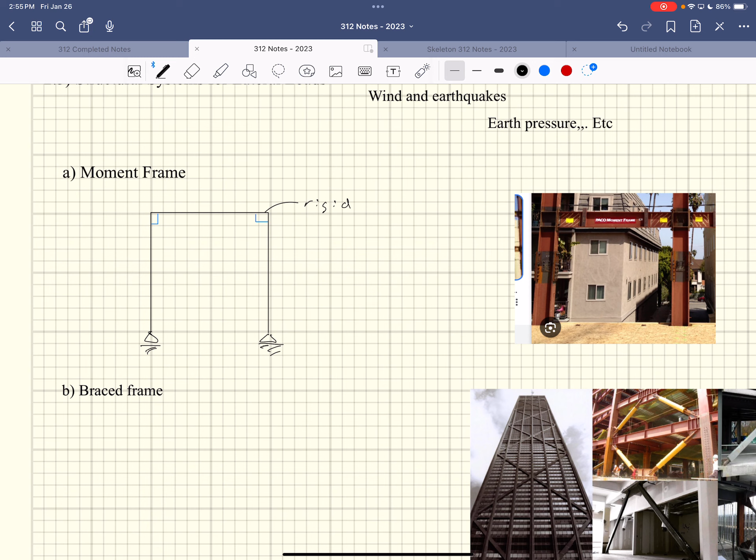I'll define what that is in a second. If I have a rigid connection, then this thing is stable. If I go to push on it from the side, these things stay at 90 degrees. If those stay at 90 degrees, it's stable. You can't push this thing over. Well, you can, it'll move, but it won't just flop over. It won't be unstable. And so we load this thing up from the side.

So like I said, you'll find these, and this kind of comes from the architect. If the architect wants a completely open floor plan, doesn't want to see anything, just wants obviously lateral resistance, a wall isn't going to work. But this moment frame will work really well because there's nothing in between, right? You have a big old window here and stuff like that, and it would be stable.

The way it would deflect, it would go like this, and then it would go something like this, and then over here it would deflect like this, something like that. You push it from the side and it would deflect. But these things, I didn't draw it right. This would be held at 90. If you drew that right, those guys would be held at 90 as they went across. So that'd be a moment frame.

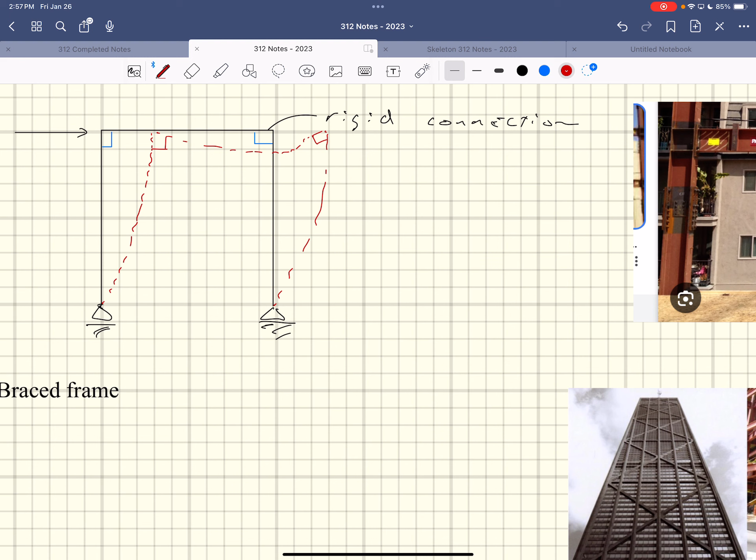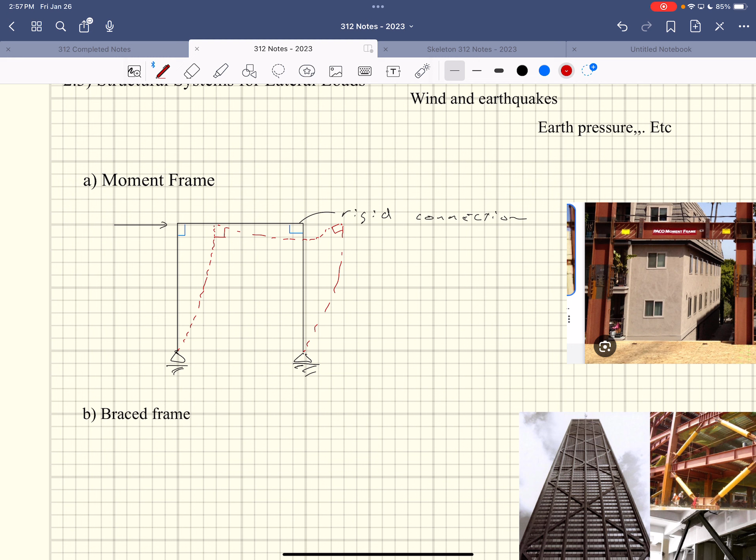That's a very common lateral system that you'll see in structures. Like I said, Norm Asbjornson, its primary lateral system in one direction at least is these moment frames. The other one is the brace frame, again very common, very common. And that's these big crosses going across like this, and that is all pin connections.

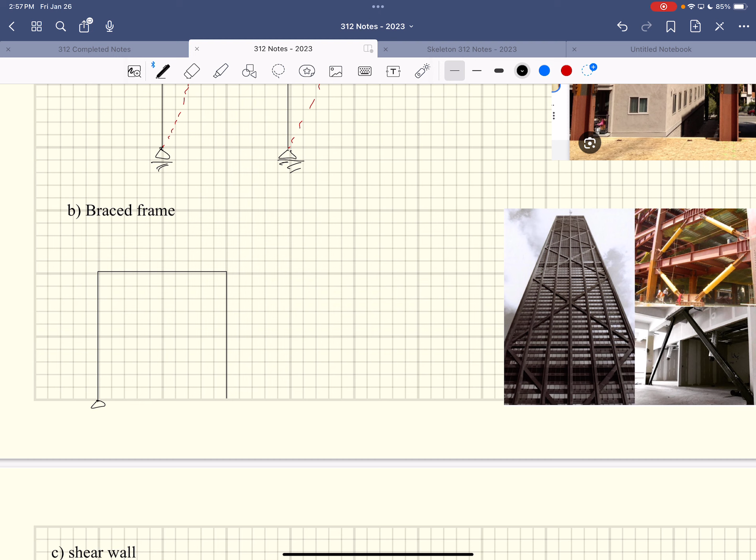Like I said, if you did this, you kind of put a dot here just to show these are like pin connections. This in itself would be unstable, like I mentioned before. But if I put in a brace that goes across like this, now this is stable, because if I push this thing from the side, this member is going to go in compression, this member will go into tension, and that will prevent it from being tipped over. And that's the whole point of these lateral systems, is to keep it from tipping over.

So these are pin connections. I mean, it's also, that's a truss really. It behaves the same. Pin connections all over the place, everything is pinned. But that sucker is stable. This guy would go into compression, this guy goes into tension.

What do you think? Usually when you do design, you often just design for the tension carrying the load. What's wrong with this side? Why wouldn't I take into consideration the compression on that thing? What happens to structural elements that you apply large loads to if they're really slender? They buckle. So oftentimes when they push on the side of this one, they don't even count that one because they're usually really slender. These are all loaded in axial loads, so they can be really small because they're really efficient at carrying loads axially. And so if this is just like a bar going across, and then you put that thing into compression, it'll buckle, and it can't carry any loads when it's buckled, but the tension side will carry it.

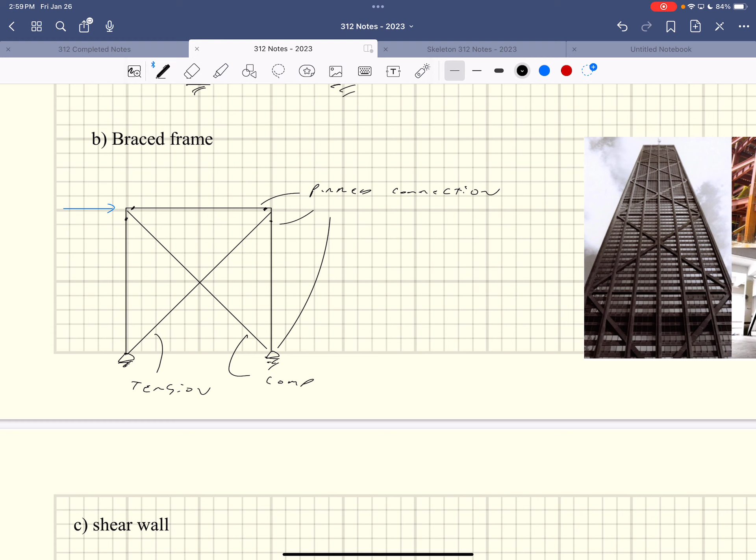So oftentimes when you design these things, you just worry about the tension. You assume this guy carries everything, and this guy doesn't carry anything. But you can beef it up and make it carry compression. So you can see these things all over the place. The old gym used to have these things. You just see them all over the place, these big lateral braces all over the place to support things. And that's a really common one.

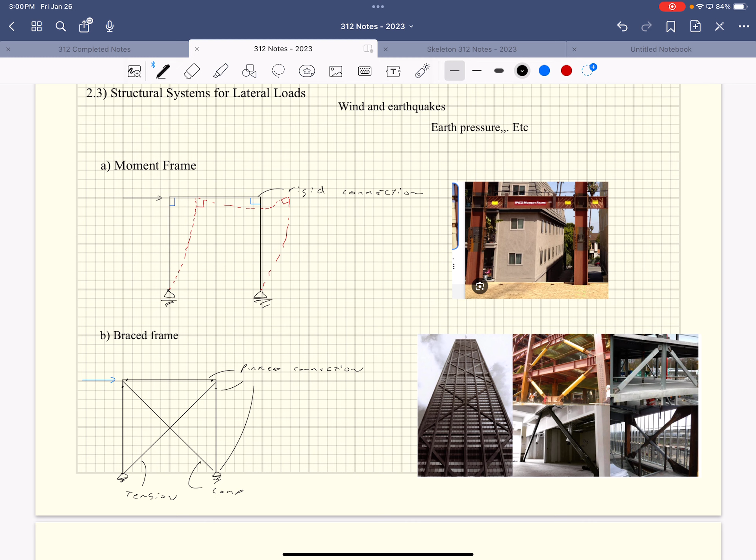Which one do you think is more stiff? Which one do you think would deflect the least under a load? The brace frame, yeah, because it's all axial loaded. Axial loaded is really efficient, and so this guy is like 10 times as stiff as this guy. This guy deflects a lot, because it's bending, it resists those loads with bending. This one resists it with axial load, so this guy is way more stiff.

And then we'll talk about the last one, shear walls. You just put walls in there, which your building has anyway, and you use them as a structural component to resist the lateral system, okay? Then we'll get into types of connections next time, a little more idealization, and then start talking about load paths as they move through.